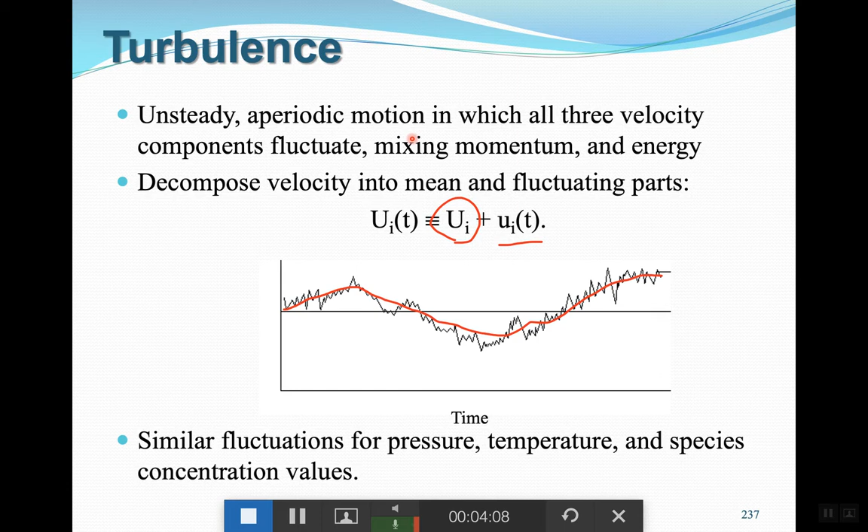And this is going to be a cornerstone of our definitions, because that's how we're going to go around difficult turbulence models and basically solve them. Of course, we have defined this as fluctuations for velocity, meaning that's a must. But if you see fluctuations in velocity, and you conclude this is a turbulent flow, you're going to see similar fluctuations for pressure, temperature, and even species concentration.

Now, let's dive more in depth into the characteristics of turbulence. See how we can identify turbulence, or if we take it a step further, how we can actually create turbulent flow. To do so, first we need to define the defining characteristics of a turbulent system that distinguish it from any other unsteady flow.

So, one, it is inherently unsteady, meaning it has 3D aperiodic swirling motions, which we can call fluctuations, resulting in enhancement of mixing, heat transfer, and shear forces. So first and foremost, it is inherently unsteady.

Having said that, as we proceed today, we will see that interestingly enough, we will use steady modeling actually to go around simulating turbulence. But that's a separate subject. We will explain why we do that. But in terms of its nature, you always consider turbulence as being an inherently unsteady flow.

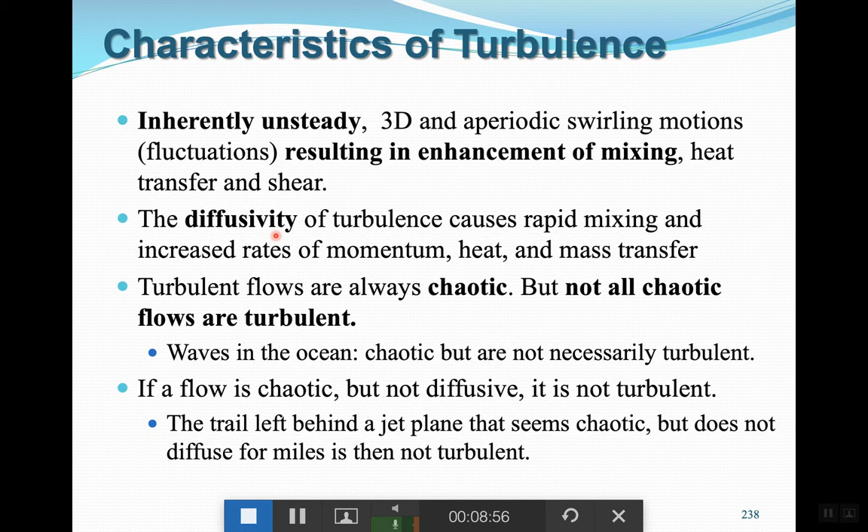Or waves in the ocean. They are always chaotic, as you can obviously see, but they are not necessarily always turbulent. They can be turbulent, but they are not always turbulent. So if a flow is chaotic but not diffusive, it is not turbulent. Always remember that. Always distinguish between a chaotic flow and a diffusive flow.

So the next one is its instantaneous fluctuations are random. Okay, obviously we discussed this, but they are unpredictable both in space and time. And that's a crucial understanding because we only explained it in time in our previous graph, but actually in turbulent flow, fluctuations are random and unpredictable both in space and time. So always remember that. Okay, so the fluctuation and randomness and instantaneous nature of these fluctuations happens both in space and time.

Turbulent flows are rotational, meaning they have non-zero vorticity. You will see lots and lots of vortices, big and small, in your turbulent flow. And actually, as we proceed, you will see relying on those vortices is crucial in resolving and simulating turbulent flows.

The other characteristic which actually makes turbulent flow simulation much more difficult is existence of wide range of length scales. Meaning you go from very, very small micron size vortices, which we call eddies. So from now on in turbulence modeling, we call vortices eddies. So you have from micron size eddies all the way up to, in big flows, maybe eddies that are 1 meter, 2 meter in diameter.

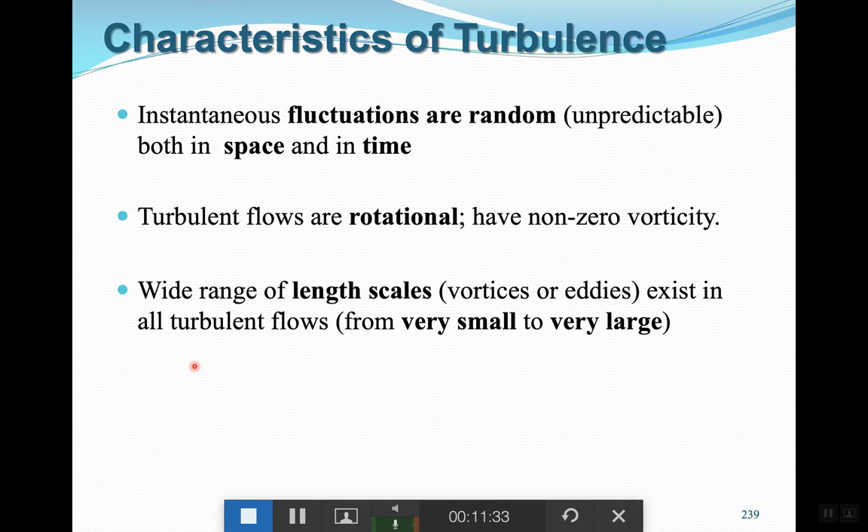Turbulent flows are dissipative, meaning they basically waste energy. So we'll see later on, but if I want to tell you in a nutshell, turbulent flow works like a system that consumes energy. So it gets the kinetic energy from the system and turns a good part of it to heat, which heat is dissipated through the wall.

So meaning, if you do not keep constant supply of energy to turbulent flows, they are gonna die out. They're gonna slow down, and once they slow down enough, they're gonna basically turn into laminar flow, or as we say, the turbulent flow is gonna die. So always remember, there has to be a constant supply of enough energy to keep up the turbulent flow.

Turbulence is a continuum phenomenon. What does it mean? It means the smallest eddies, the smallest vortices that basically define turbulent flow, those micron size eddies, are a couple of orders of magnitude larger than the molecular scales. So in no way is turbulence a molecular scale. Okay, so for that reason we call it a continuum phenomenon.

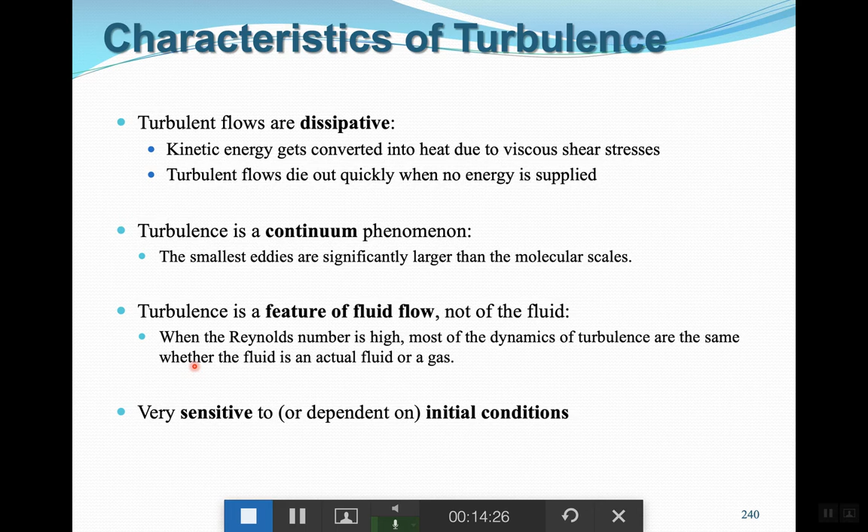Okay. Turbulence is very sensitive to initial conditions. When we talk about initial conditions here, guys, we are talking about the state of your system at time equal to 0. At the beginning of your time, what was the state of the system? That's called your initial condition. So turbulent flow is very, very sensitive to initial conditions, and any change in the initial conditions can alter the flow.

Okay, so the criteria for turbulence. So we discussed different characteristics of turbulent flow, but all of those characteristics were basically qualitative characteristics. At the end of the day, when you're solving a project, when you're about to perform a simulation, you gotta decide by the numbers whether your flow is turbulent or laminar. You do that by calculating Reynolds number. As you know, Reynolds number is basically... okay, sorry.

Reynolds number is basically a non-dimensional number that relates your momentum forces to your viscous forces. It is your density multiplied by a characteristic velocity multiplied by characteristic length divided by your flow viscosity.

Now, in calculating Reynolds number, density and viscosity are of course simple, but be very careful about velocity and characteristic lengths, because these two we call them characteristics because basically they have to be something representing flow, and this becomes tricky when you are talking about a flow that has a wide range of velocities, like from 1 meter per second to 10 meters per second, or you have wide scales of lengths. For example, in some corners of your domain you're going to micron size, in other places you're going to meters.

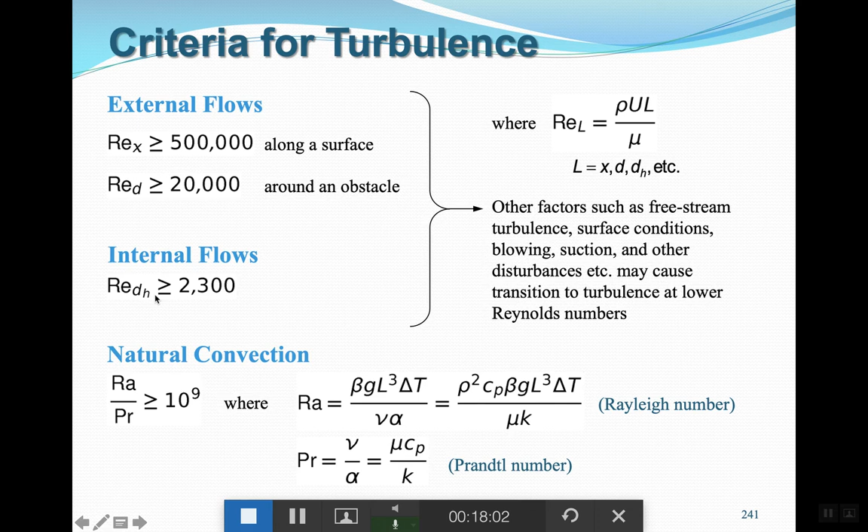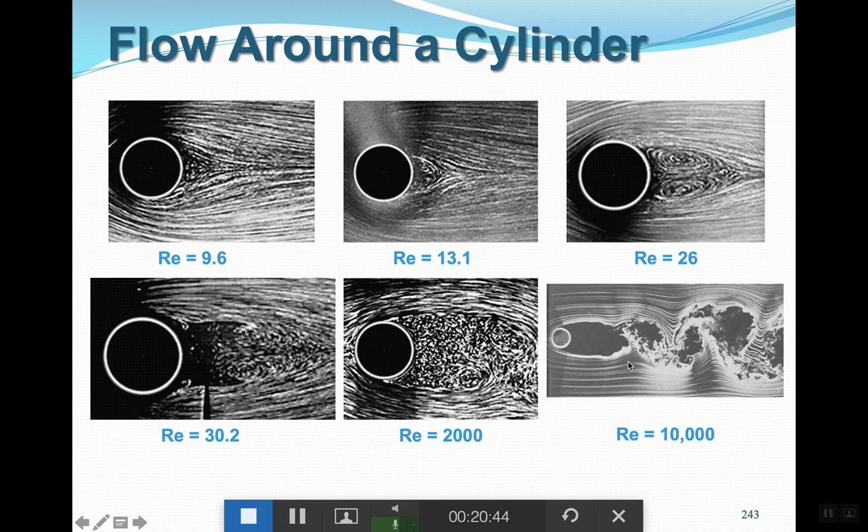Now, we mentioned about the transition. Let's look at the transition a little bit more. If you are below your critical Reynolds number, you are conveniently at a laminar flow. If you are above that number, you are basically in turbulent flow. But the problem is neither laminar flow nor turbulent flow, because you know the path, you know the methodology, and you know how to go around it.

The problem happens when you're in a transition flow. When you are in a transition flow, flow cannot be considered laminar nor can be considered turbulent. So that makes it very difficult for simulation. And that's something where basically you have to perform a laminar flow simulation for it, then a turbulent flow simulation for it, and then compare the results and choose the best possible result.